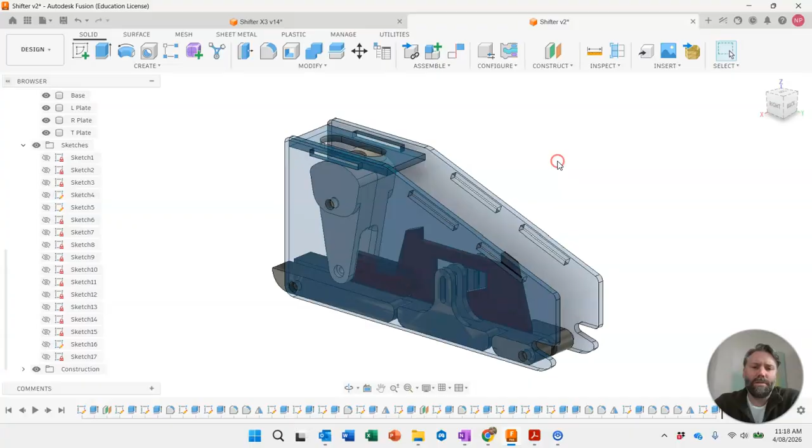Now we can make our front plate exactly the same way we made the top plate. In this example, I'm going to do it in a slightly different way, just because I can show you a different way of doing it. So I'm going to turn on Sketch 16, which was the sketch from the side plate, and we're going to use this sketch we've already created to make this front plate.

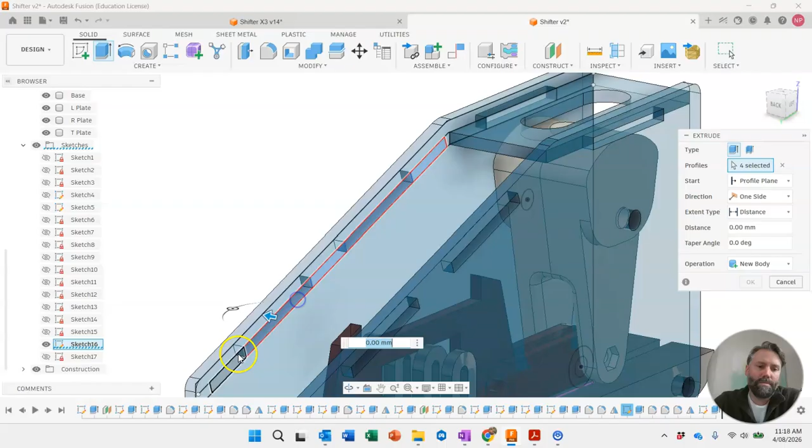So extrude, and extrude all of these, and I'm going to extrude them to this other side. It's a new body. Okay. So that's just extruded a single plate between the two sides.

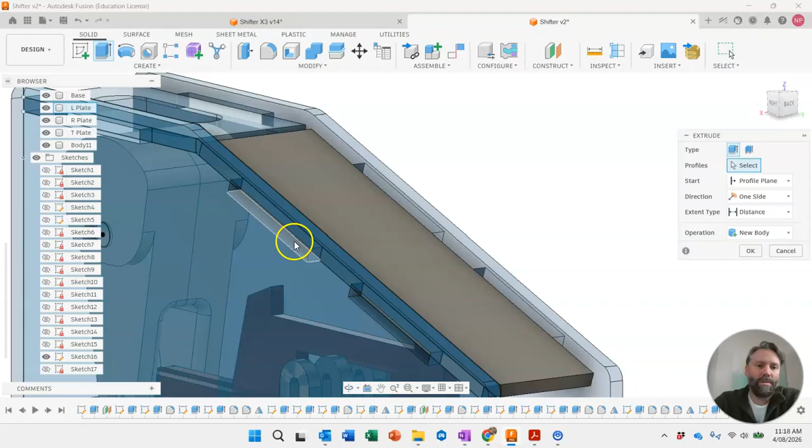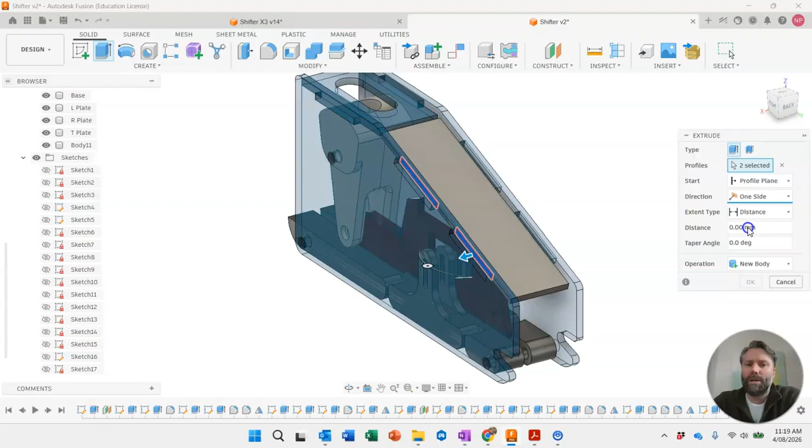And then while we've still got that sketch turned on, we'll extrude these two edges, or faces rather. So I guess this way requires two extrusions, but I don't need a sketch in this scenario because I already have it. So instead of doing one side, I'm going to choose two sides. And the first side is going to go to here, and the second side is going to go to here.

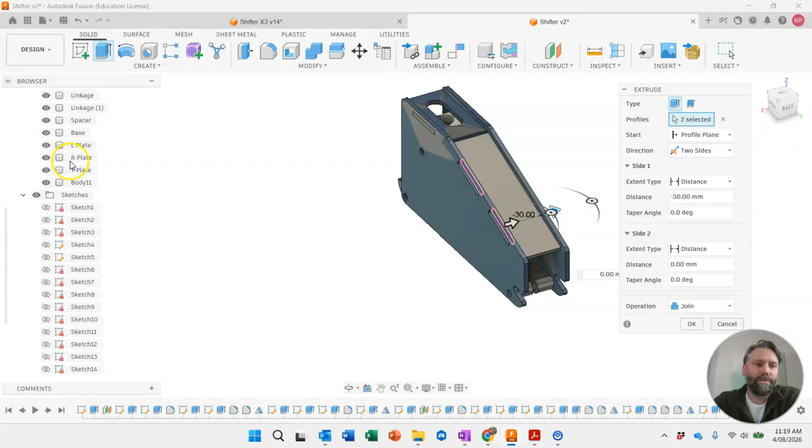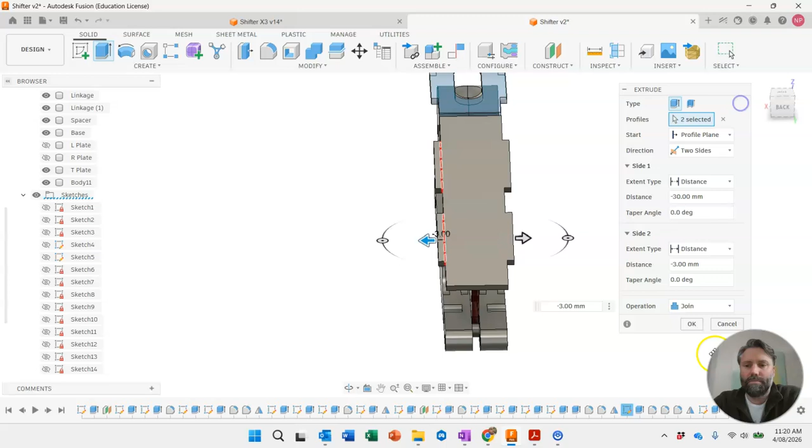Now, by default, it'll want to cut because we're going through some existing geometry. So we'll want to make sure it's selected as a join, but we don't want to join the two side plates to this middle plate. So we're going to turn off our left and right plates. Oops. So first side's going 30mm, the other side should be going 3mm. That's 3mm. So it can be joined because we want to join it to this other body here.

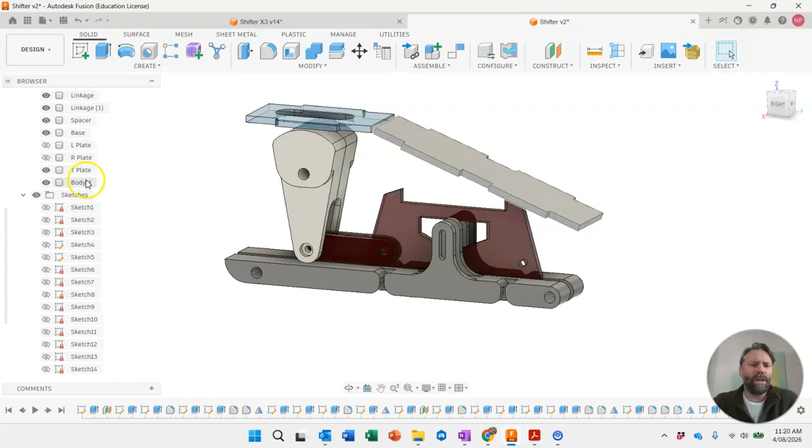Now, when I first made this, there was a button sitting in here. I find that the cables from the button get sort of tangled up in the mechanism. It's okay, but I think the button will be better placed on the side of the design. But we're going to call this one F plate. And again, we'll paint this one up.

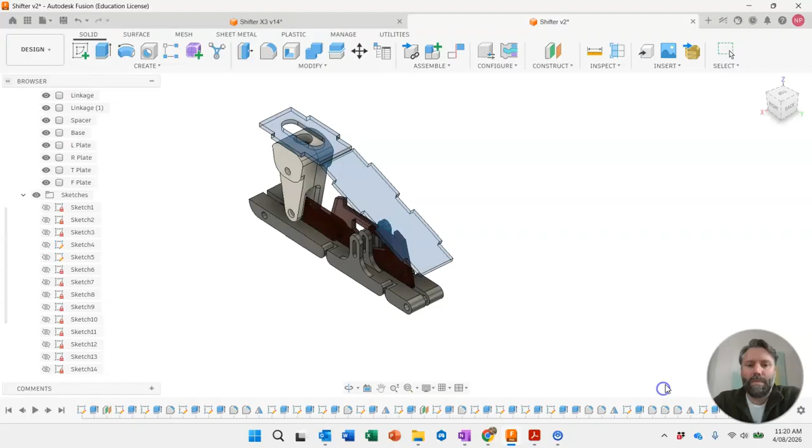So that's our laser cut enclosure for the shifter. There's a few things we need to add in. We've got a whole bunch of nuts and bolts to drop into the design. And of course, we've got a sort of a micro switch mount, which will sit inside